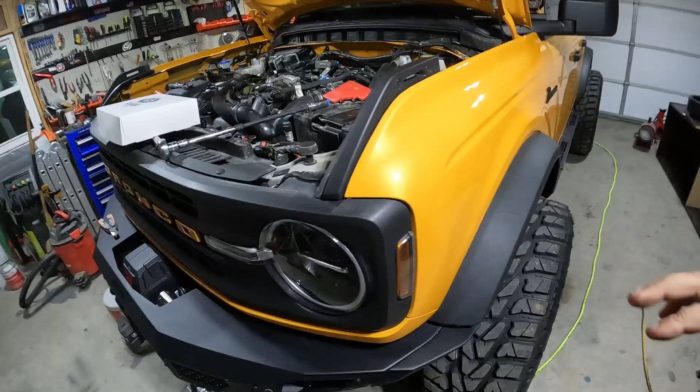My name is Bill, and this is a Panda Motorworks power module, Panda power module, and we are installing it on the Bronco. Now this is kind of a tuner without being a tuner. I don't know all the technicals. I know it doesn't actually write anything to your ECU. It just kind of overrides the signals that are coming and going to your map sensors, and changes the voltages.

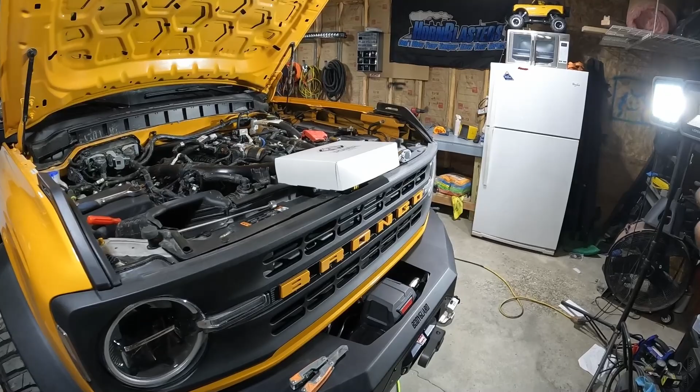So it tunes things without actually writing a tune to your ECU. So if you ever were afraid to take it for warranty, which, yeah, everything else I've done with this thing by now, I'm not too concerned with the warranty, but anybody that is concerned about warranty, it doesn't leave a trace that it's been in there. You could just disconnect it. It hasn't written anything to the ECU or anything like that.

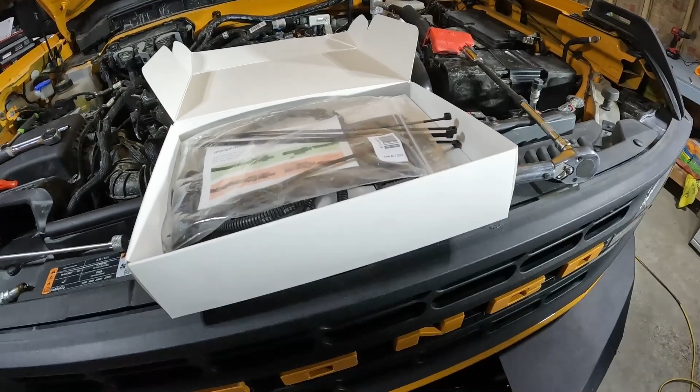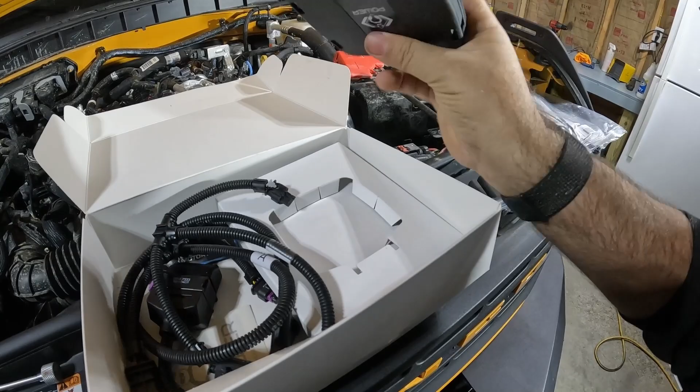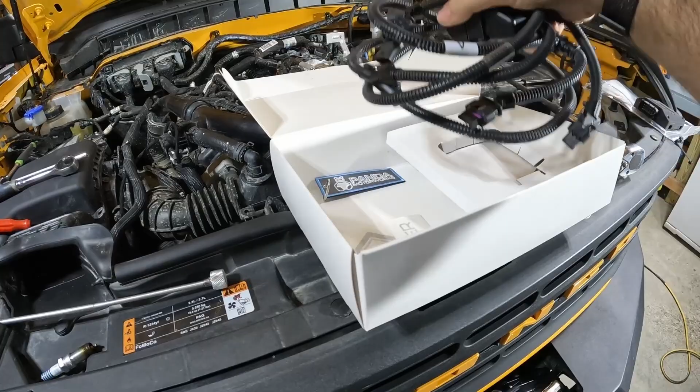It comes packaged a lot prettier than this, but I've had it open. It's just some zip ties and brackets so you could put the actual module anywhere that you want, somewhere inside the engine bay where it's out of the way. Then you got a wiring harness, and it's pretty simple. And then it also comes with spark plugs. Now they recommend changing out the spark plugs to

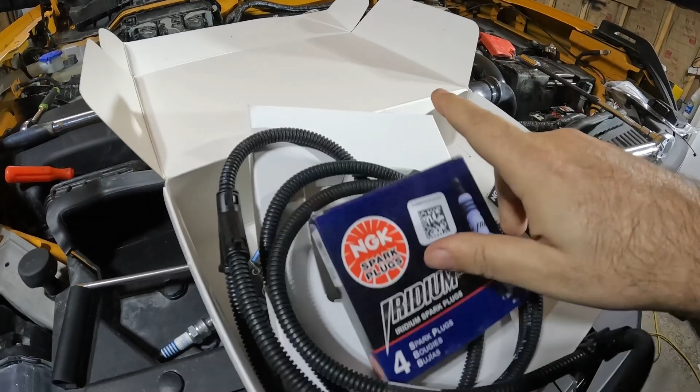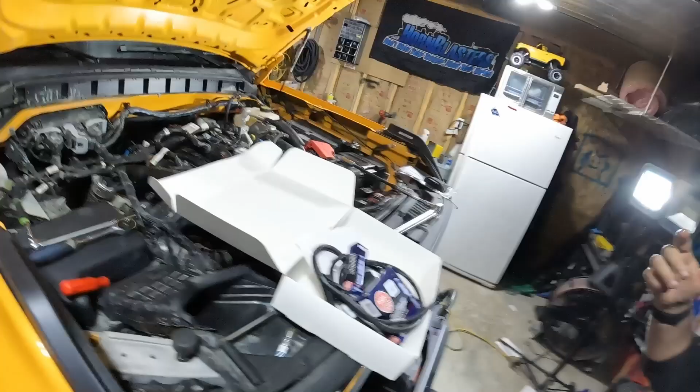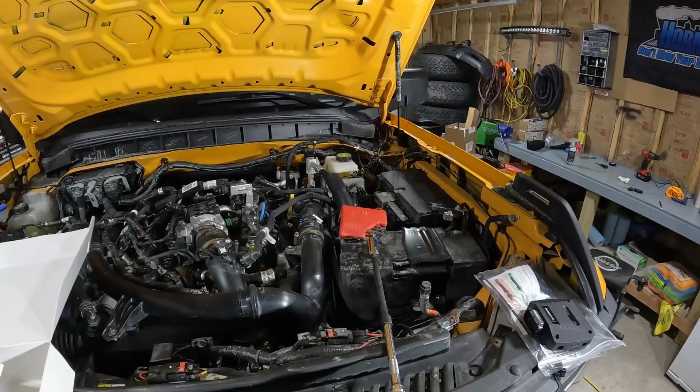one-step cooler spark plugs. To tell you the truth, I don't necessarily understand at all how it works, why it works, or even if it works. But yeah, I like these guys over at Panda Motorworks. They've done a lot of stuff with the EcoBoost previously, with the F-150s and Mustangs and Ford Focuses, and they've done a lot of tuning with this. So it's not like this is their first time messing around with the EcoBoost. They seem to have things dialed in, and they claim to get pretty good boost for horsepower and torque, being just a simple plug-in module that you could pull out anytime.

So I'm going to go ahead and do the install here. This isn't something that is sponsored or anything. This is something I saw they were coming out with. I was interested in it. They had a launch discount for New Year's, for Christmas, that I grabbed. So I did get it at a little bit of a discounted rate, but it wasn't a special rate just for me. It was for anybody that pre-ordered. So I'm gonna see if it's worth it at the discounted price, or if I would recommend it even at the full price.

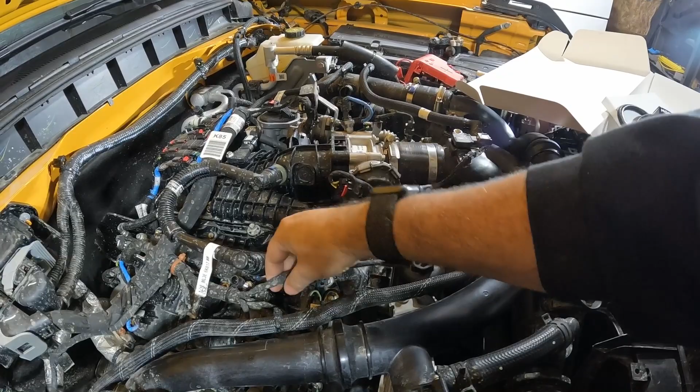So to get started, I'm gonna have to change out the spark plugs. I'm gonna do everything how they recommend it. Now, if you have the 2.3, the setup's gonna be a little bit different. You're only gonna have 4 spark plugs instead of 6, but it's basically going to be the same. There's a lot of these little caps that go on the screws that hold all the wiring. So I've got a panel removal tool to help me pry some of them up so I can move wires out of my way. I already did this first one.

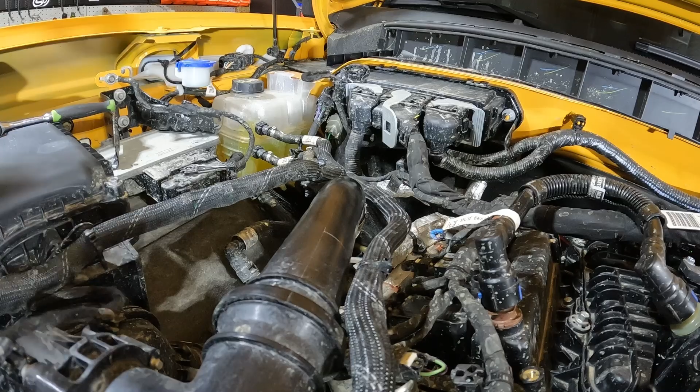So now I've come to the second one. You see it's got this big wire bundle, and it's just capped sitting right on top of that post. So what I need to do is kind of pry that up, and I don't want to keep pulling on just wires, so that's why having a little pry tool. And you rip the skin off your finger as part of the process.

Now that we got that cap off of there, I'm going to go ahead and disconnect the wire harness, which is pull back this plastic tab, and then you can squeeze down on it and take it off. Now I want to take this bolt right here out. Well, it's a stud, not just a bolt, but this whole thing will come out. It's 8mm. You'll need a somewhat deep socket to pull that out.

Should be able to pull that out, set it to the side. And now we can pull the whole coil pack out, which I have to kind of move the wire harness out of the way, pull the whole coil pack out, and then pull out the spark plug.

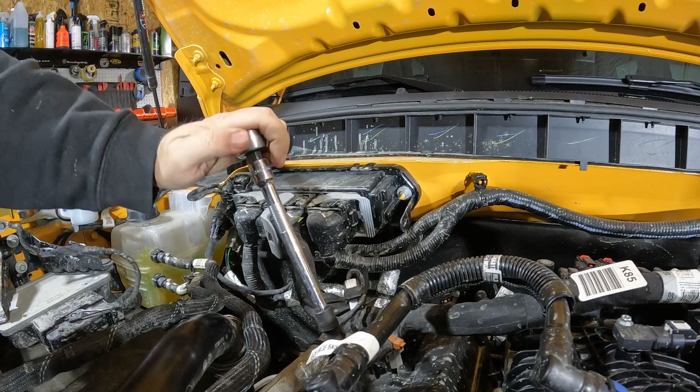That seems over torqued to me. So the torque on the spark plugs when you're tightening them is supposed to be 133 foot-pounds, I believe, or I'm sorry, inch-pounds, not foot-pounds. Don't torque it to 100 foot-pounds. It's 133 inch-pounds, so that works out to be about 11 foot-pounds if all you have is a foot-pound wrench, like I do. Just divide by 12 and you get your conversion.

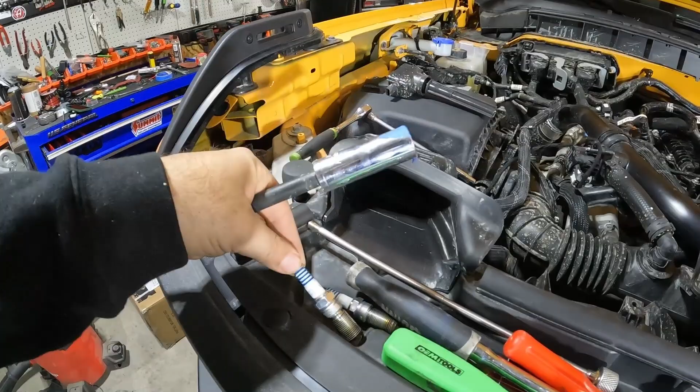So here's the spark plug taken out. Nothing wrong with it. Perfectly fine. It's only got 7,000 miles. So it should be good. And then I'm just replacing it with these supplied NGK. I said they're one step cooler. Recommended if you're running extra boost, like you will be if you're running the module. But even if you have the module disconnected, they're not going to hurt anything by having them in there. It may not benefit you. It's not something that you should go out and change if you're not going to be running power with anything. But if you are, then it's recommended to swap these out.

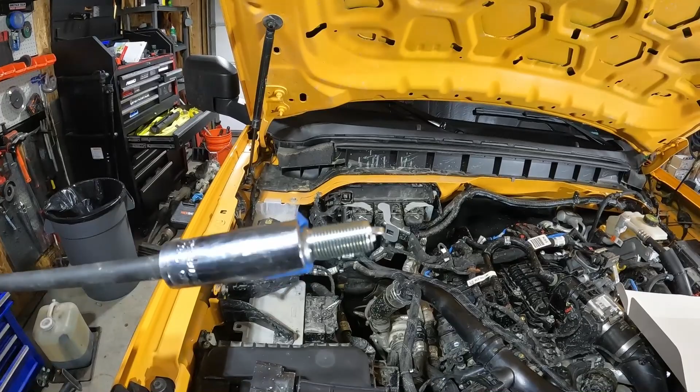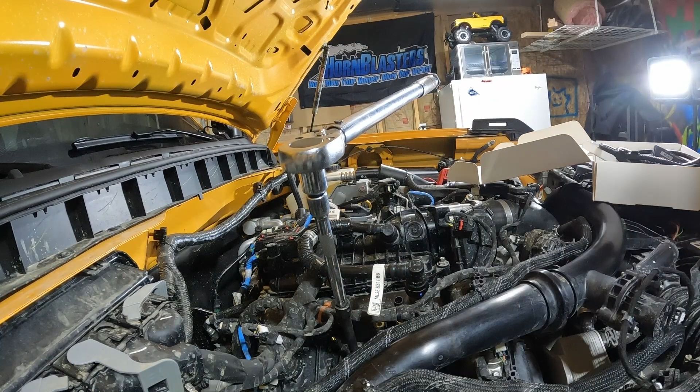And now, of all the tools I have, a spark plug wrench that fits these is not one I have, so I just put some tape on the inside of my deep socket to make sure that it's pinched on there, and it's taped to the side, so I'm not actually ripping anything off and leaving it in the engine. So that's that, and then tighten it down with my torque wrench. I said this is only 11 foot-pounds or 132 inch-pounds, so it's not much. It doesn't take much. Jeez, I'm standing on a plastic bucket at an angle, so it keeps trying to slide out from under me. See, yeah. Doesn't take much. That's not much for the torque on those.

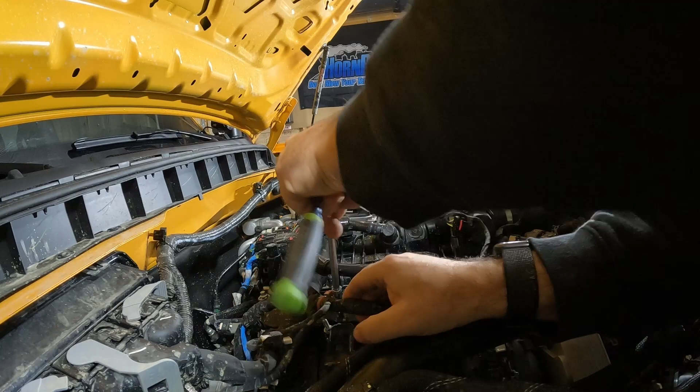Then we just set our coil pack back in there. And this is what it looks like. Like I said, it's got this longer threaded part on the top side too, because that's where the wiring harness is and the little, I don't know what you would call that officially, but just little wire bundle bracket thingamahoober. Now I'm not sure what the torque on these is supposed to be. Did not find that. But just snug. It's an 8mm, so it's not something you want to put a whole lot of force on. If you're going by the size of the bolt, then 8mm, I think max torque is not much more than the 11 foot-pounds anyway. So this snug should be good.

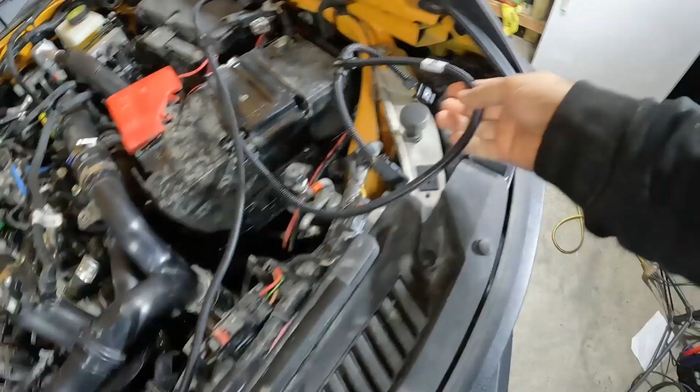Now I got the first two. Just got to do this rear one here, which is going to be same process, and then do the other 3 on the other side, and then the spark plugs are done. Got the spark plugs all in, got everything tidied back up. Now we have this wiring harness to install. There's 2 branches, an A branch and a B branch. The A branch is going to come back here to this map sensor that is on the intake. That's going to be this connector right here. And pull that clip out, squeeze it. Now, basically, we're just installing this harness in between there. We're kind of hijacking the signal, sending it over to the power control module, and then sending it back through.

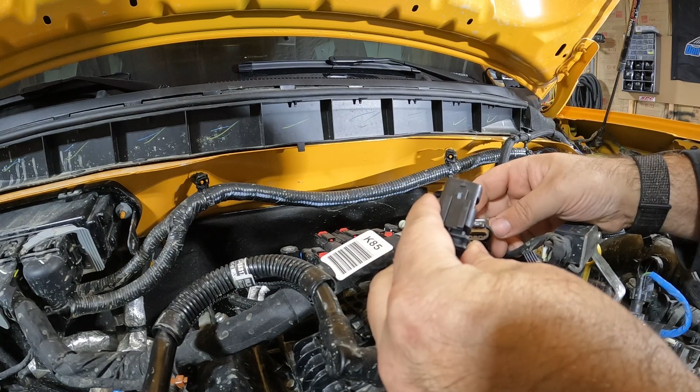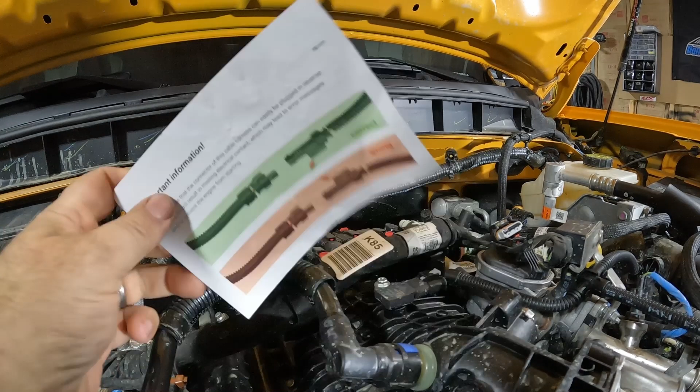So here we'll take this, and it should only fit in there one way, I would imagine. Yeah. Go in there, push that, and then the other side will connect through. Now, before I plugged that in, there was an insert with the wiring harness which shows the correct way to connect that. So it's saying this big piece should face down, and allow that to snap in, and then slide forward, and that snaps like so.

Now here we're going to do the same thing. Over here by the throttle body, we're going to go to the other map sensor, pull that, disconnect it, and then it's going to be the same thing. Plug that in, lock it in, and this should go like so.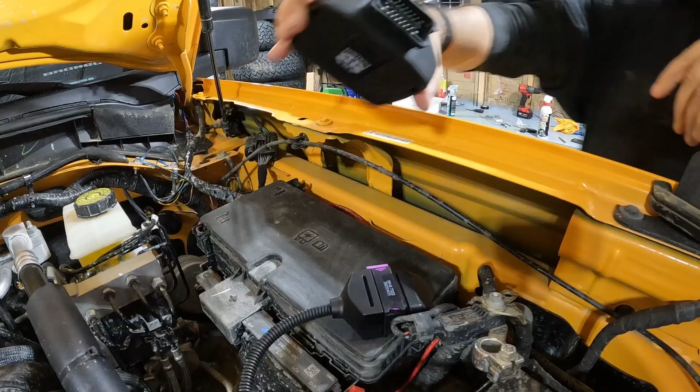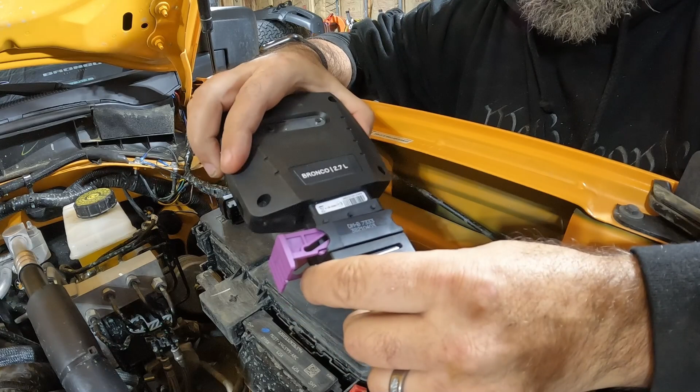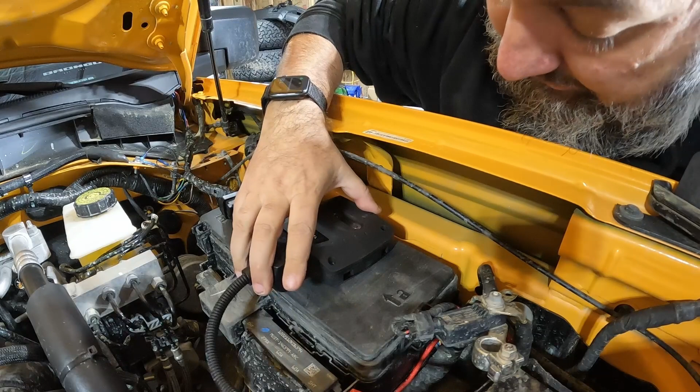Lock it in, and there we go. So now we have the actual module itself. Got a plug. It had a blank off plate in there to keep everything good. Now I imagine this only fits one way. Yes. So only fits one way, and push it in, lock it in, and this is going to go wherever we find a spot for it, which seems right on top of the fuse block here. Seems to be just as good a spot as any.

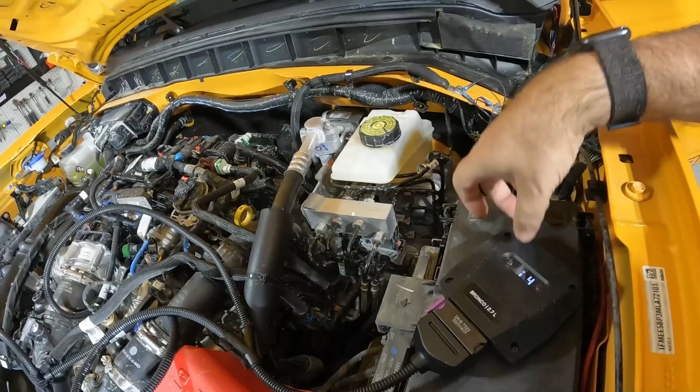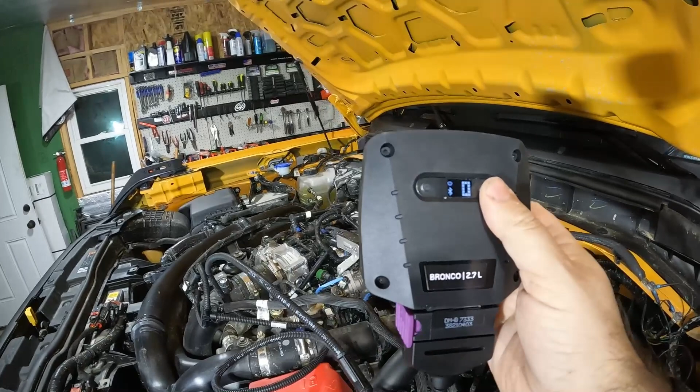Alright, now that we have everything connected, still need to clean everything up, tie up those wires, but before we do so, I'll go ahead, start the engine, make sure when it's on, there are different... so we got power on. We got Bluetooth, and we should be able to connect this to Bluetooth so we could change the tune.

Okay, it looks like there's 7. I don't know if 0 is considered off, and so there's 6 tunes or 7 tunes, or what each of those tunes are exactly just yet, but it came and it was set to 4, so we'll try that one out first.

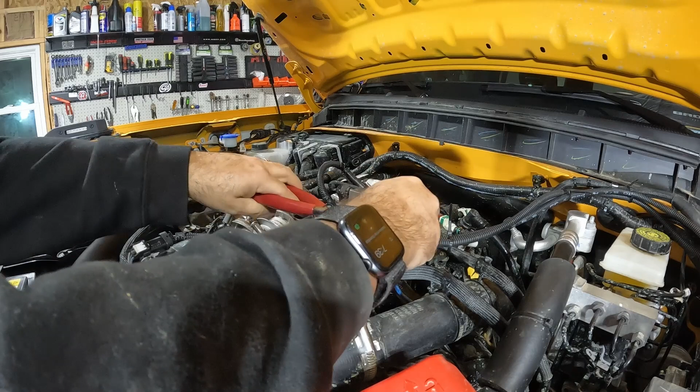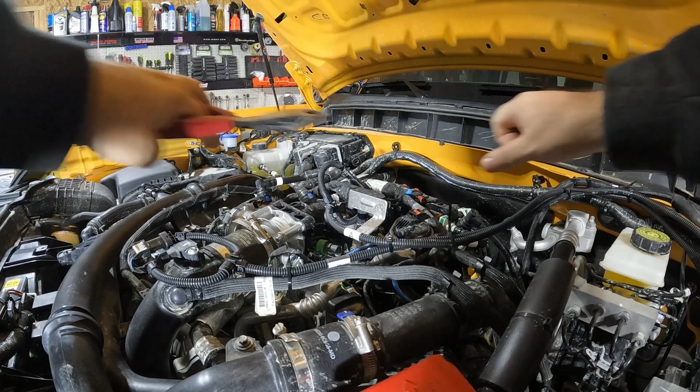Ran a couple of zip ties along the cables just to kind of make sure everything was together. There's no loose wires flapping around in the engine bay. It's not the prettiest job of routing wires, but nothing in this engine bay is really all that pretty anyway, so I'm not too worried about it.

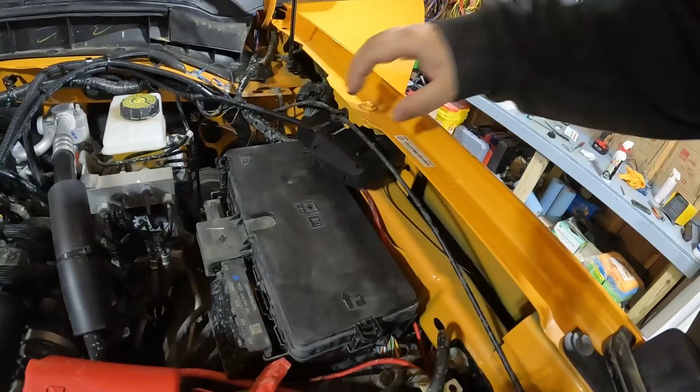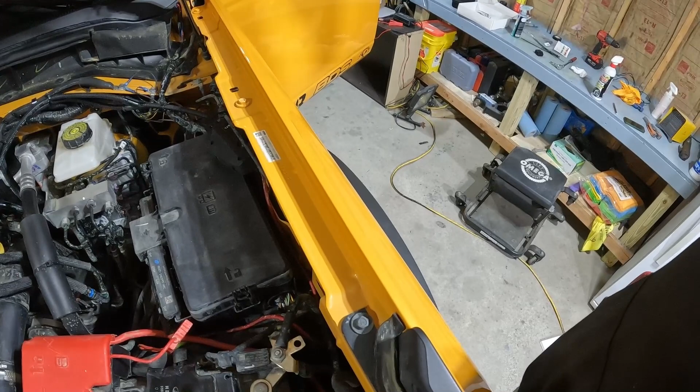The module itself, I just got one zip tie through this hole here in the fender support. Just the fender support actually, and going through there. So this is still loose and can move around to wear things out, so need to find a better place for that. But I didn't want to spend too much time on something that I don't know if we're even keeping yet or not.

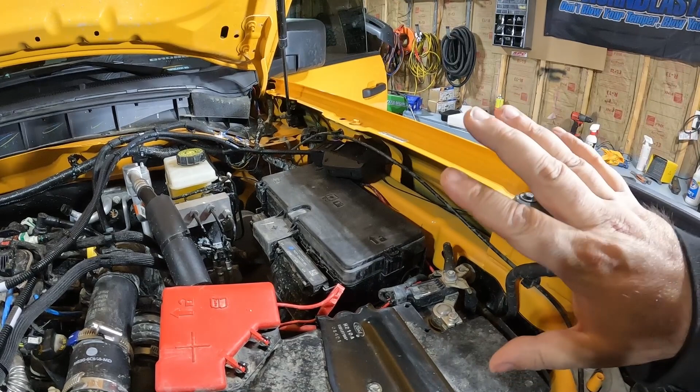I'm a little disappointed so far. The instructions for installing it are good. The instructions as far as using it are a bit lacking. And maybe I'm missing something and didn't see it, so I don't want to say anything yet, even though I just did say something. But I would go take it for a drive with just how it is right now and see if I notice anything different. Then I'm going to contact them.

All right, guys. So I talked to the guys over there at Panda Motorworks and got it figured out. There is an app that you got to download and install, and then you have 3 buttons here. You have Eco Mode, Sport, and Race. And then you can go into fine tuning and define which settings you want that to be on. So for Eco, I have it set to 3. For Sport, I have it set to 5. And for Race, I have it set to 7, which is the max.

Then you could have a warm-up timer. So when you first start your car and start driving, have it set for 2 minutes. So for the first 2 minutes, it'll just drive regularly. After 2 minutes, it'll switch to whichever mode that you have this set to. And then like I said, if I want to tune it down, you can, or you could just turn it off completely.

But yeah, then once you have those set, anytime you want to change it, you can just come in here, turn it to Eco, Race, or power it off and deactivate tuning. So yeah, it's easy to use once you know how to use it. I just didn't know that I needed this app. So now that I got the app and everything kind of explained to me, it makes it a lot easier to use.

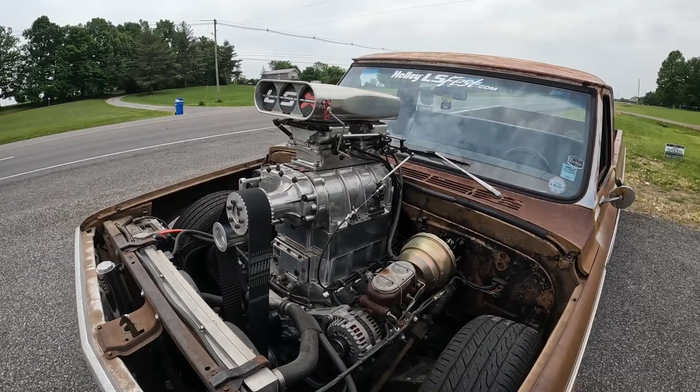So we're gonna head down there now. All right, so here we are out at Recon Performance in Eddyville, Kentucky. They are going to take care of getting the dyno, and just taking a look at this small little engine going on here in this thing. But yeah, they're getting it strapped down.

We're going to do a couple of runs, see what it looks like, and then crank this thing all the way up and see just how much the power, I can't remember what it's called, Panda Works power module, what it gives us, or if it gives us anything. So.

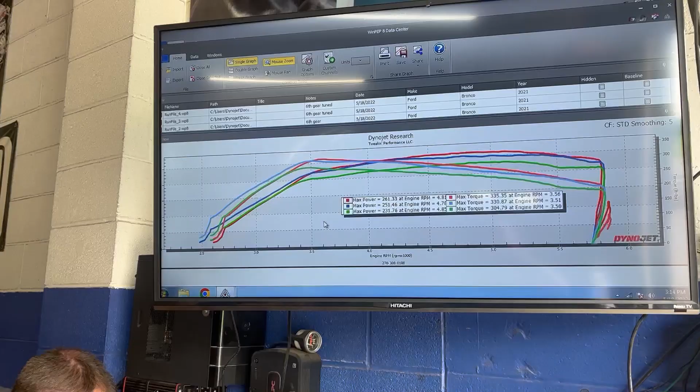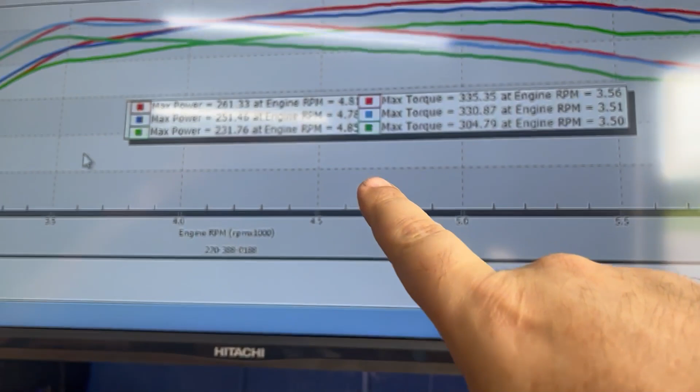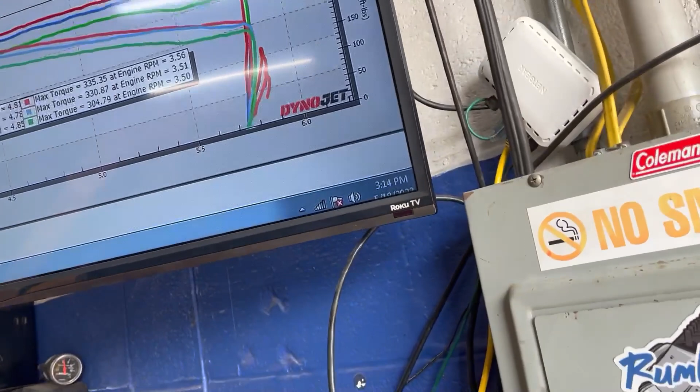So we're looking at the chart here. And in 6th gear, we're running in 6th gear on stock tune, 231.76 with 304.79 for max torque. With everything up to 7, we got 261.33 and 335.35 for torque. So 30 extra horsepower and almost 31 extra torque. So yeah, I would say this does make a difference.

All right, guys, we're back in the garage. Sorry, my battery died on me there, and I always have backup batteries on me. And the one time I really needed them, I didn't have any backup batteries with me. I don't know why I didn't take any with me, but I didn't.

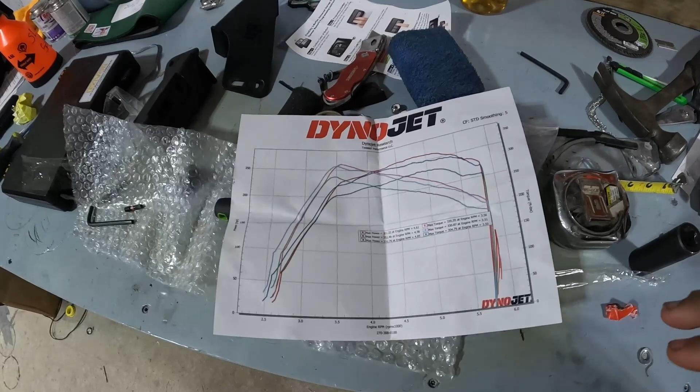So we're back in the garage. We got the results. Now, I did shoot a quick video on my phone. Hopefully it'll turn out and I can add it there. But here we're looking at the results. We ended up having to test everything in 6th gear.

Now, the reason why: 7th gear is the 1-to-1 ratio, and that's ideally the gear that you want to do the pulls in. However, there's a governor on the Bronco, and we were hitting it in 7th gear. So in 7th gear with stock tune, we were hitting the governor, just trying to do regular tests. We went down to 4th gear, 5th gear. We weren't getting up to speed. And at 6th gear, we were able to do the pulls with no problem.

We did hit the governor at 100, because as soon as it would get to 100, it would just stop going from that point when it slammed on the gas. So it would go, and then it would get almost to red line, and then it would also hit 100 miles an hour, and it just shut down, no more power at that point. But when we did it in 6th gear, I think we got up to like 80 miles an hour. It was perfectly fine. So that's what we ended up doing the test at.

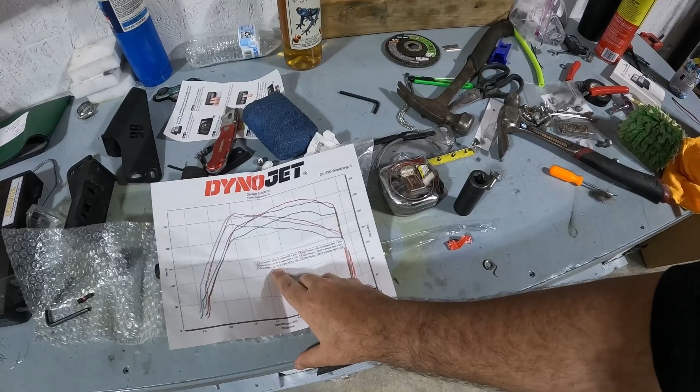And with that, we ended up with 231 horsepower and 304 for the torque. Now, when we did 6th gear and turned everything up to 7, we did end up hitting that limiter again, but I was hitting it just at the same time I was hitting red line in 6th gear. So we hit the governor and it shut down, but I was just about to take my foot off the gas anyway right at that time, because that's right when we were hitting red line as well.

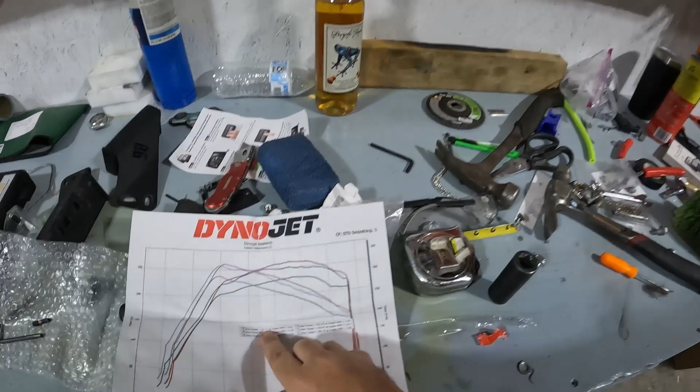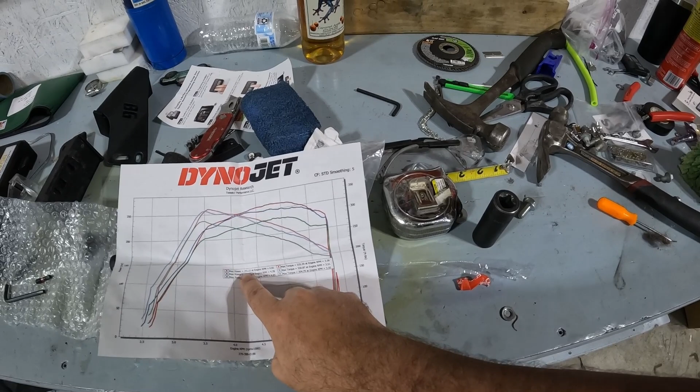But with that, we ended up at 261.33 for the power and 335 for the torque. So that is an increase of 30 horsepower and almost 31, or 30 and a half foot-pounds of torque. So another couple of things to note.

If you do the math, Panda Motorworks claims that this power module is going to do a 20% increase. And if you do the math, these are only 15% increases. But there's a couple of stipulations with that. We could have kept going. We could get that 20% increase. When they did their initial testing, they did so on stock tires.

If I had stock tires on there, these numbers would be a lot different. I have those big 36 by 13 and a half R20s with some big old 20-inch wheels. I have a lot more rotating mass. So had I put the stock wheels back on there, I have no doubt that we would probably get close to the same exact numbers that they got when they did their initial testing.

The other thing is the air temperature. I have an aftermarket bumper. I have a winch right in front of my intercooler. So even though we have a fan blowing, it's not blowing directly into the intercooler. It's kind of going over. And once Mishimoto comes out with their intercooler that's going to move it up in front of the radiator, I think if we reran it then, we'd also get a difference.

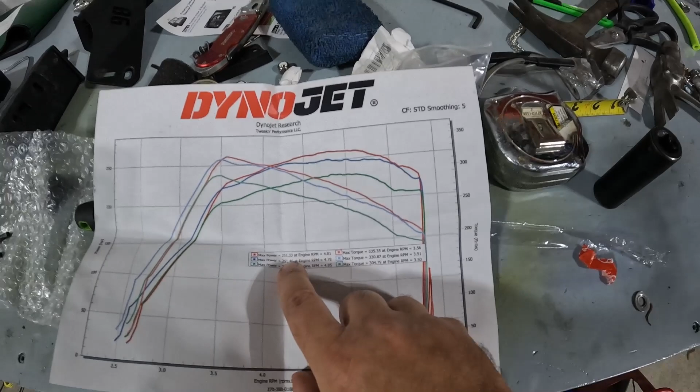That's what these two different runs here are, the 251 and the 261. The 251 is what we ran. We did a few test runs, we got everything dialed in, we realized 6th gear was going to be the best gear to run it in. So we ran 6th gear, then we immediately switched it to 7 on the power module and ran it again. When we ran it again, it was the 251, 330.

We let it sit for about 5 minutes, just sitting there talking, with the engine running, letting everything cool off a bit. About five minutes passed, we re-ran it one more time after giving everything a second to cool down, and that's when we hit the 261, 335. If we would have let it cool for even longer, we probably would have gotten higher numbers. Or if we had better airflow directly to the intercooler, we probably could have gotten even higher numbers.

But that wasn't the point of us testing. We weren't trying to get the highest numbers we possibly could. We could have sat there all day, and I guarantee we could have gotten higher numbers out of it. But that's not real world. That's not what you're going to do in the real world. I wanted to know, in the real world, is this beneficial for your Bronco?

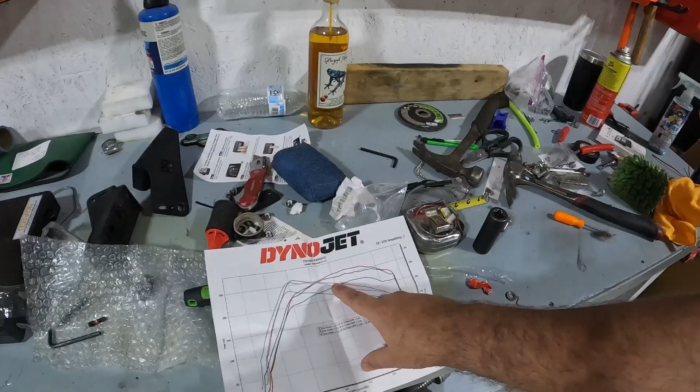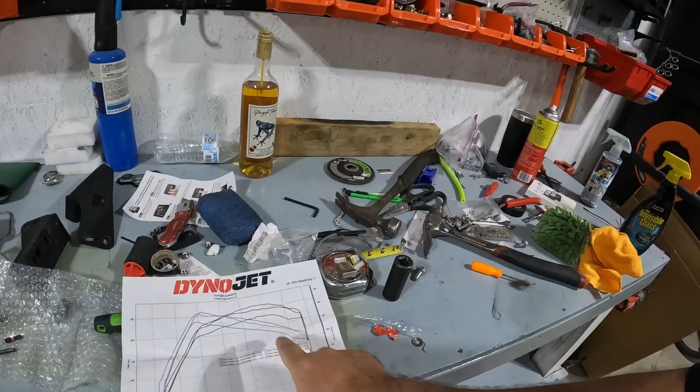Does it make more power? Yes. Does it give you more torque? Yes. It stayed a lot steadier. It's not just a little bit more power, but it's steady power. It's not just a big one-time blip where I got a little bit of power for 1 second and we measured that. No, it remained higher the entire time. Same with torque, you could see it stayed a lot higher. So yes, it definitely does make a difference.

If you're running everything else stock, stock wheels, stock gearing, everything, you'll definitely notice a difference. If you have a few hundred pounds of extra weight from bumpers and skid plates like I do, and bigger tires with larger rotating mass, basically I just set the Bronco back to stock. I might have a little bit more power than I would with a stock configuration without all the add-ons, if that makes sense.

Does Panda Motorworks' claim of 20% more power and more torque hold up? I would say yes. I didn't hit that 20%, but again, different testing scenarios. The bigger wheels and tires are going to make a huge impact. That's a lot more rotating mass. It's going to affect the way the test comes out compared to stock tires. If I hadn't sold the Black Diamond tires and had put those on there, we would have easily matched.

If I had taken the front bumper off and gotten some cool air going straight into the intercooler, we probably could have matched that easily as well. But under normal driving conditions, it still gives a significant boost. So if you're looking for a quick, easy way to get some extra power out of your Bronco, that you can just disconnect and take off if you do have any problems, this is it. I was happy to see the dyno results actually proved that it worked.